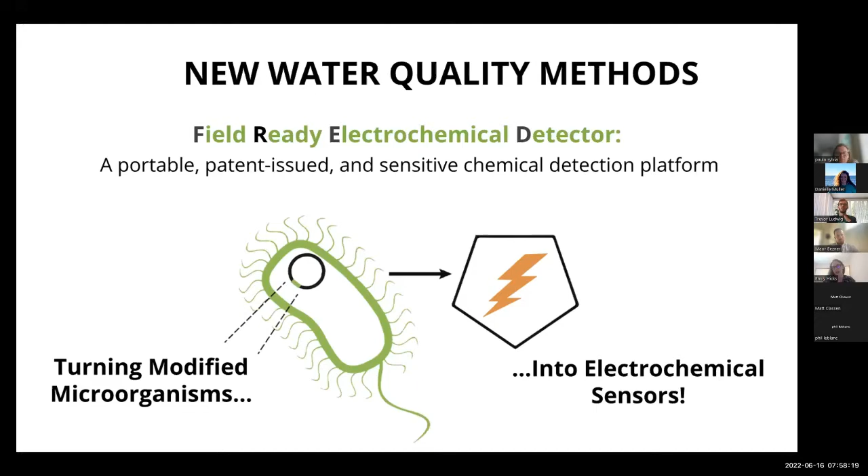What we determined was that using bacteria, we could create hardware and software systems to enable this field measurement. What's really interesting about bacteria is that they've evolved over many years to detect all sorts of different contaminants they have to interact or respond to. We spent several years creating hardware and software systems around this to allow us to use these sensors in a field environment.

The FREDsense model today is based on a cartridge. We make small cartridge units that you add a water sample into. You plug it into one of our FREDsense devices. It does an incubation period, and in about an hour, it has data ready that it can transmit to you about the concentration of a specific parameter.

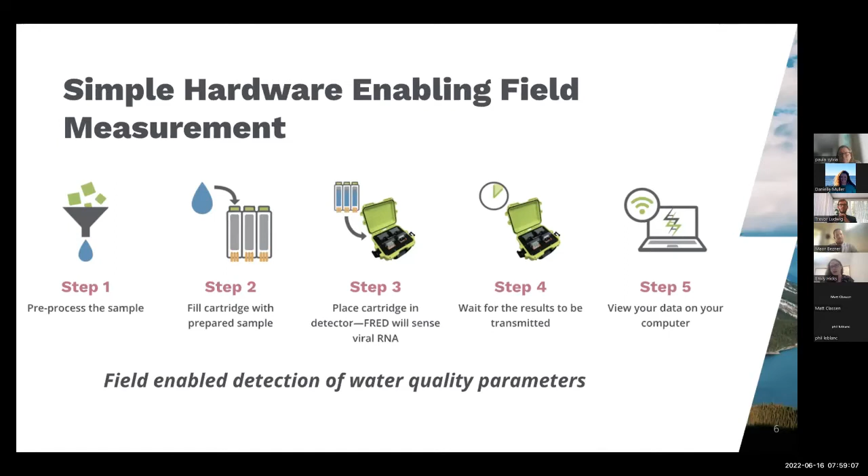The company started initially with arsenic analysis. That was the first sensor we built and is commercial now. This was really focused around groundwater and around utilities in the southern US.

We realized that there's arsenic naturally occurring in many groundwater systems across all sorts of different countries, and lots of places have active remediation, but they really don't have ways to actually measure that in real time. They're often relying on analytical lab results, so they get a snapshot of what arsenic levels looked like maybe 2-3 weeks ago. That's not terribly efficient when you're trying to streamline a process and make sure that you're always remediating within an appropriate amount of time.

So our first sensor was called FRED-Arsenic. We used a bacteria that we engineered to be able to detect arsenic, and we were able to get some really great results. This was some data that we collected with a partner utility in the southern US, where we were looking at measuring a series of different groundwater wells across their system using the FRED-Arsenic system, and then comparing it to both a process lab that they had on site, as well as a compliance lab that they were using to do their quarterly sampling.

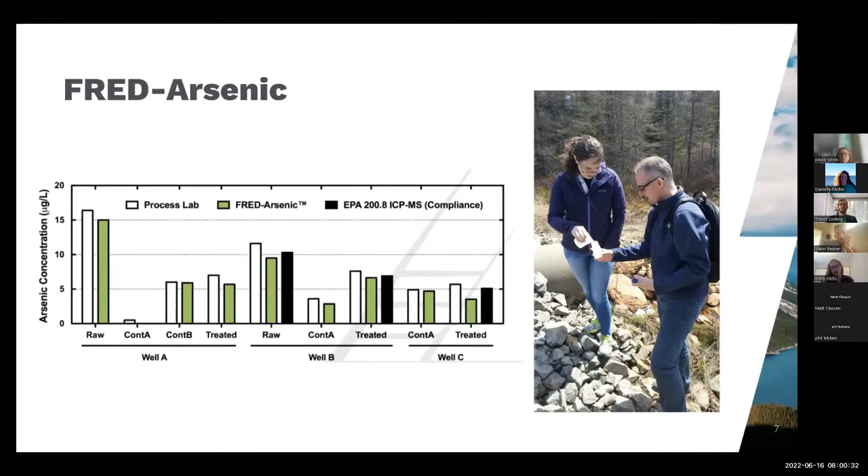We're able to see some pretty good results where we generally were able to come within 2 parts per billion or less of what the analytical lab was seeing. This was really helpful for them because this allowed them to use our system on site to be able to actually streamline their remediation process without having to always rely on the analytical lab each time.

As we developed things further, we had a really interesting project with a government group in Canada, and we were working with them on developing a sensor for an additional heavy metal. But they also had a request to develop a sensor for acidity. This was a really interesting challenge because bacteria aren't really very equipped to develop sensors for acidity. That's not really a parameter that they can detect.

So we were looking at other ways to build in a solution for this that could work with our existing platform. This led us down a path of using a lot of the skills that we developed in terms of creating field-enabled hardware and creating robust solutions and some liquid handling components. We started developing more of a colorimetric platform, and we did some work creating an acidity and an iron sensor for this government group.

We were able to get some really great results with a field kit that we created that had very little input from the user. This was one of the early prototypes in yellow, and you can see it has 2 little sample bottles on it that a user would essentially fill up with a water sample, plug into the unit, hit go, and it would run an acidity and an iron measurement on it.

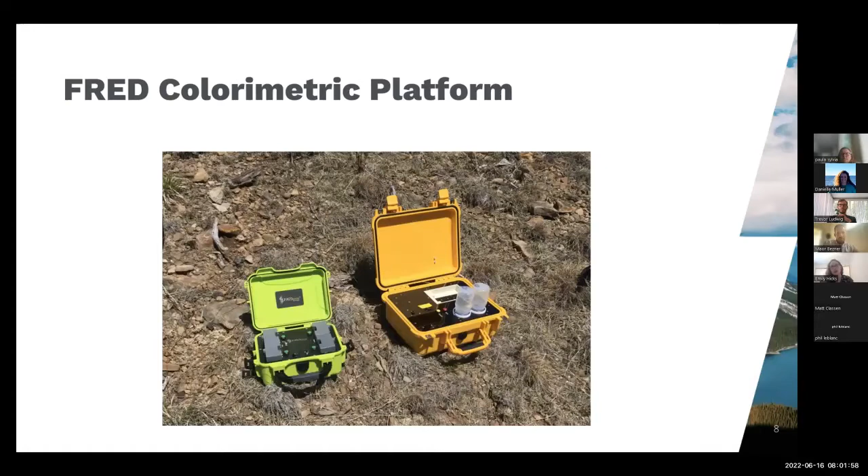This was really exciting for us and led us down a bit of a different pathway because we realized that there was a lot of different parameters that we could build on this colorimetric system and really provide this easy to use system in the field, building on a lot of our core hardware that would allow users to be able to measure some of these things in real time. So that led us to get more involved in things like stormwater and ports and looking at what kind of parameters might we be able to measure after a storm event, for example.

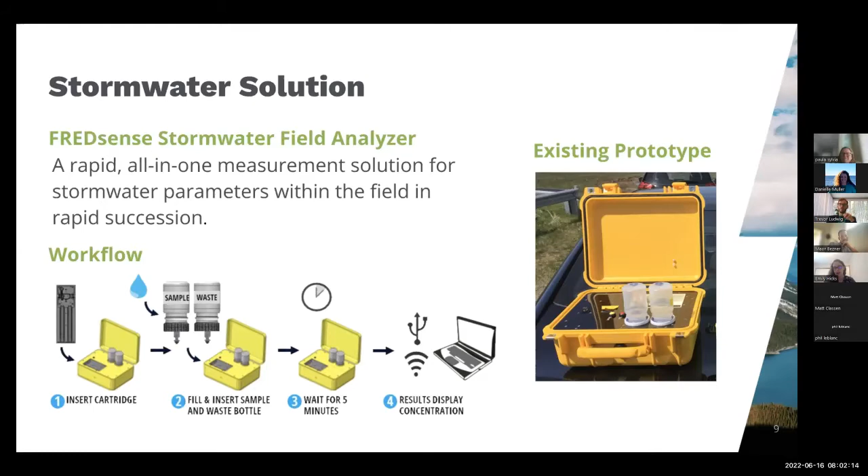This was kind of the development of a bit of a sister platform for us at FREDsense, which has been really exciting. This is really what's led us to the work that we're doing with the Port of San Diego, which we're really, really excited about.

We've started work with them on developing a 5-in-1 solution for measuring some different heavy metals. We're focused on the detection of copper, nickel, aluminum, lead, and zinc, and essentially creating a portable unit that allows a user to be able to measure these by just taking a water sample, plugging it into the unit, and we then have a cartridge-based system that's able to have the reagents stored in it for this test and able to run these different parameters and be able to report data on this.

This has been really exciting for us because it's a little bit different than what we normally do, but fits into a lot of the hardware solutions that we're using. It has allowed us to get a lot better at things like liquid handling and automation, which in turn is allowing us to push forward some of the work on our biosensor platform, where those were really holdups in some of the development that we were looking at, especially as we look to the future to more automated, potentially even inline systems for some of the groundwater work that we're doing.

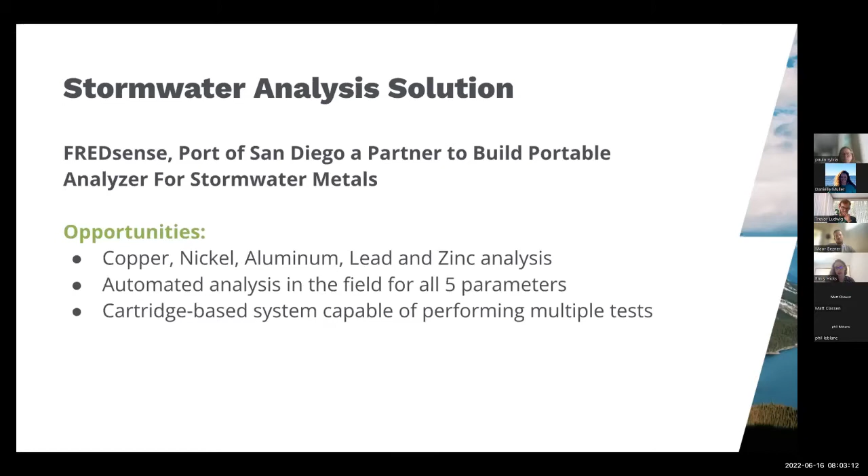Some of the project objectives that we have are really just to demonstrate accuracy of these tests. We're doing some work in the lab setting, which is what we initially started with, then starting to build some of these field tests, and we're planning to do some field pilot work with the port. Eventually the goal is really to have commercial delivery of the system.

So we're hoping that through doing some comparison analysis of our test with the analytical lab, using real world samples in a real world setting provided by the port, we'll be able to show the use case that the system is easy to use and that we're able to get high quality data. Hopefully this will lead to eventual commercial delivery of the system, and our ultimate goal would be to get some kind of regulatory approval on this down the road.

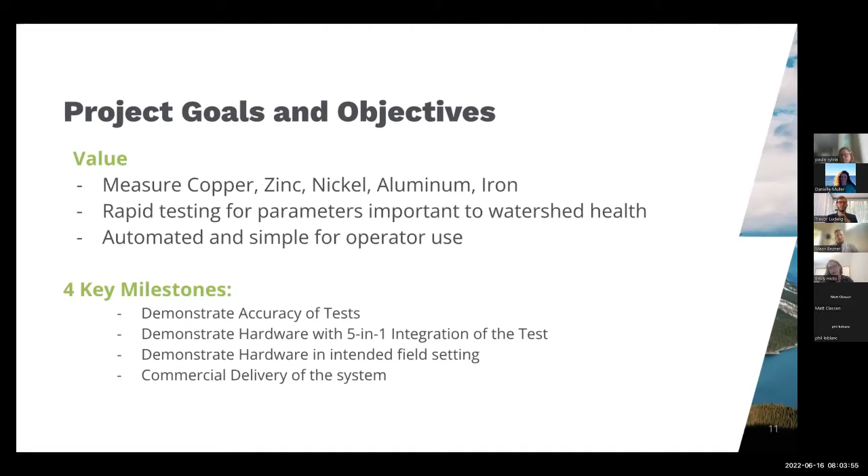So really the goal behind FREDsense is to create a real platform. Outside of some of the stuff we've been doing with the port, outside of our arsenic work, we have a suite of other sensors that we've been working on that are either at pilot phase, commercial, or earlier stage. We've been doing some interesting work on COVID-19 analysis in wastewater, and we have some interesting projects with partners looking at emerging contaminants such as PFAS, selenium, and other heavy metals.

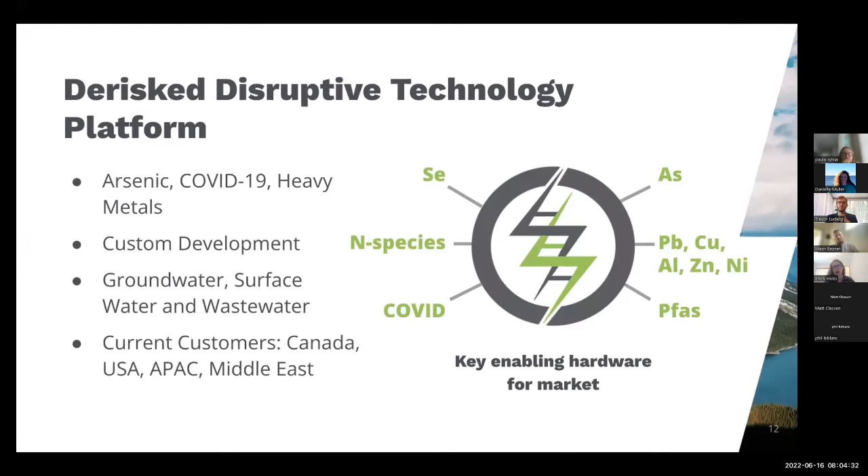And we have customers today across Canada and the US, but also doing some interesting work in the Middle East as well as APAC. So I'll leave things there. I hope that gave you a little bit of information about FredSense, and I'm happy to answer any questions you have or connect with you in the future. Thank you so very much.

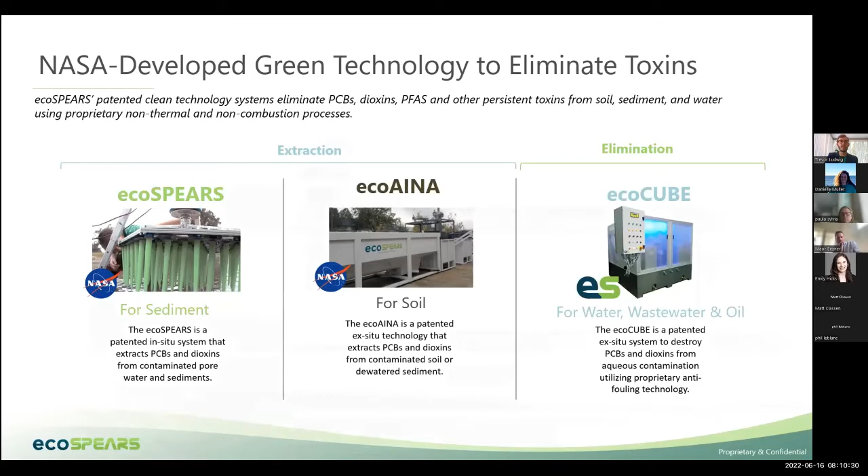So to give you guys an idea of what spears really do and how they work - since everything that comes out of NASA has to have an acronym, so do the spears. SPEARS stands for Sorbent Polymer Extraction and Remediation System. It's a fancy term for saying that they're 12 or 18-inch spikes that we put an alcohol reagent on the inside of. The picture on the left here is actually the one that we did with the Port of San Diego, and that was a really key piece for us as a company and for the technology, as it was our first in-field live application of the technology for impacted sediments.

What was interesting with the Port of San Diego is they had an endangered eelgrass species, which I'm sure a lot of the ports around have - species that have really sensitivities for some of the methods that they have for cleanup. In utilizing our spears, we're able to go around where we've seen the eelgrass in the past and continue to do a passive remediation surrounding that sensitive environment. So we're not actually destroying and having to repopulate or replant that species elsewhere throughout the port.

One other important thing that we had with the Port of San Diego is an economic incentive for the port. With most current methods, if you're talking about doing remediation in the port, you're either talking about dredging or capping, which can shut down the port for an extended period of time to do that same remediation for the impacted sediments.

What our spears has allowed us to do is work hand in hand with the Port of San Diego in busy port slips like what you see here, to deploy our spears down into the bottom sediments and then move the boat off site, and you'll get a passive remediation. What we're doing with the Port of San Diego is going to be an evaluation of 24 months for the absorption rates of the spears themselves for low-level PCBs within the port.

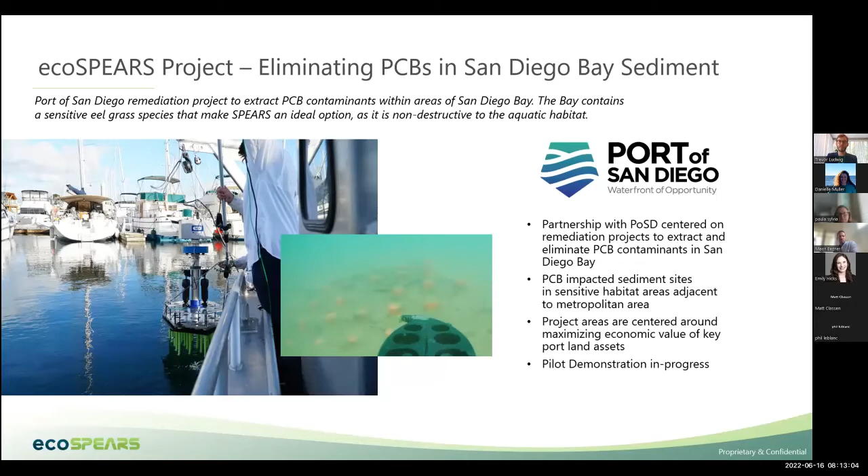We also signed a pilot with Umeå University in Sweden. This really challenged us - we knew we could deploy our spears in a strategic area from what we've learned with the Port of San Diego. Now it's a matter of, can we do it in an area that's not common and familiar to us? So we picked a fiber bank that was also an old paper mill.

Instead of having your endangered eelgrass, here we're actually deploying around logs, and we're going after impacted dioxins rather than just the PCBs and PAHs that we have with the Port of San Diego. So we had a lot of lessons learned from the Port of San Diego that really helped us out with Umeå University, thinking about how we're branching out from PCBs to dioxins and PAHs.

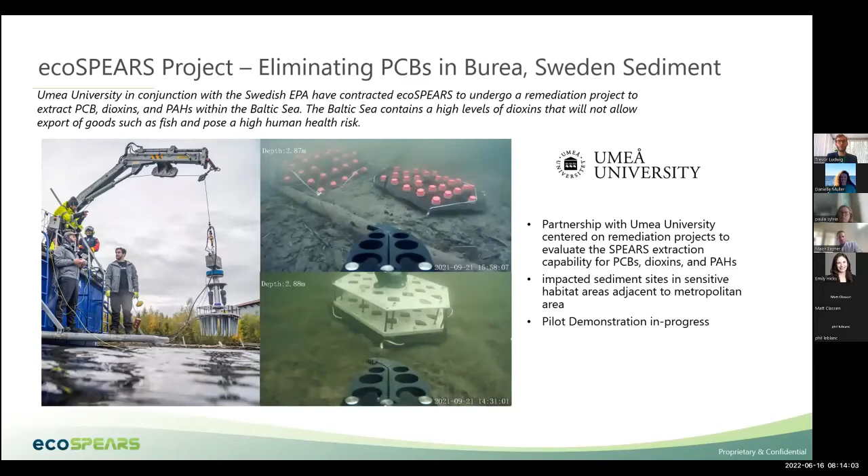What happens if we're now looking at more upstream areas, like in a tidally influenced wetland area? This is what we're actually working on now for a client on the Anacostia River. This is a PCB area that is more of an upland setting. The tide comes in and it's roughly underwater for about 7 hours. The tide leaves and it is a walkable wetland area.

So in looking at how we can help more of the ports in these coastline communities, we're now able to walk out to these wetlands and do just a down pressing of the spears themselves without the use of boats altogether. What we're really targeting is trying to hit the PCBs before they make their way into these deeper sediments that could potentially be washed out to the ocean altogether.

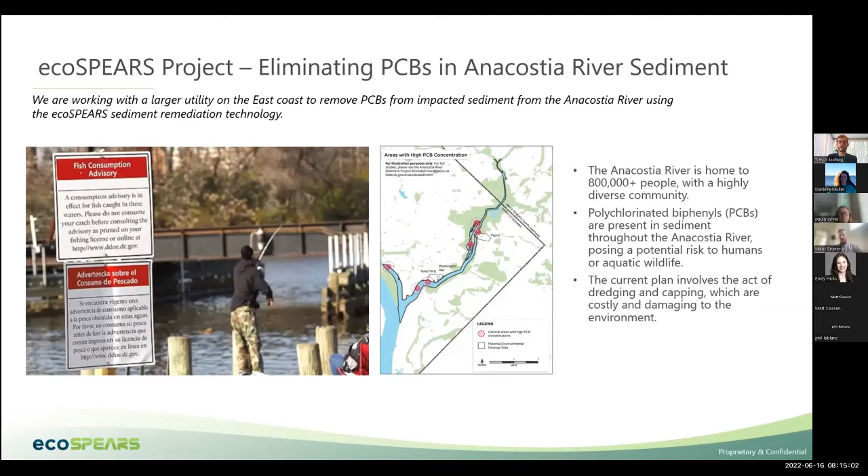Think about this area as more of us creating a curtain of spears, where as the pore water is moving in and out of that bulk sediment area, we're going to try to absorb those chemicals before they make their way into the river and then out to the sea down below.

You have about a minute left, Trevor. Awesome, Matt, thank you. Perfect timing, because this is actually the end of the presentation here.

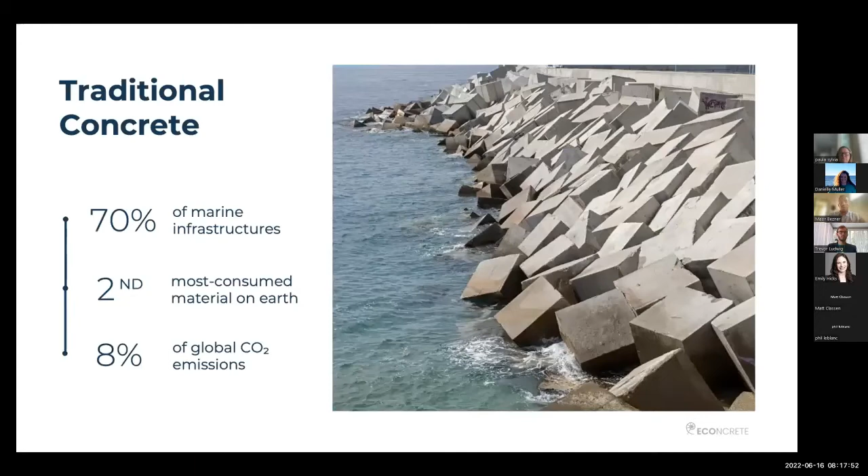And concrete is not, let's call it, a very good ecosystem for the natural habitats of these waters. It's not such a good habitat because of the byproducts of mass production and because of its material composition, which tragically enough make it the best material for marine construction.

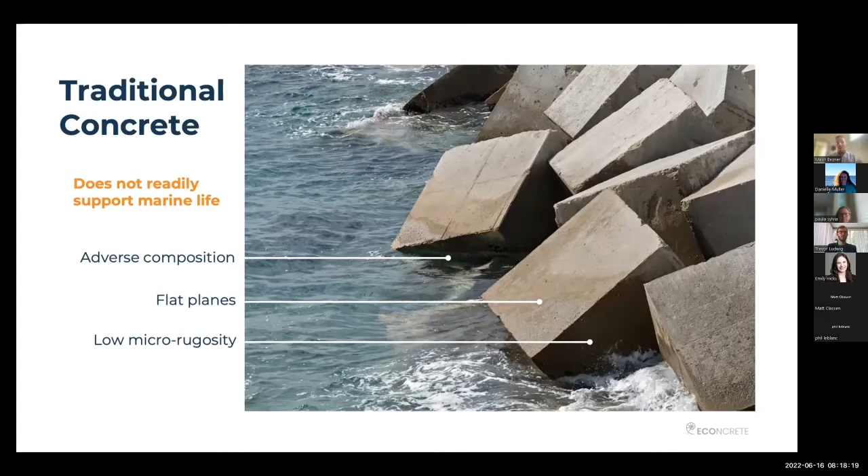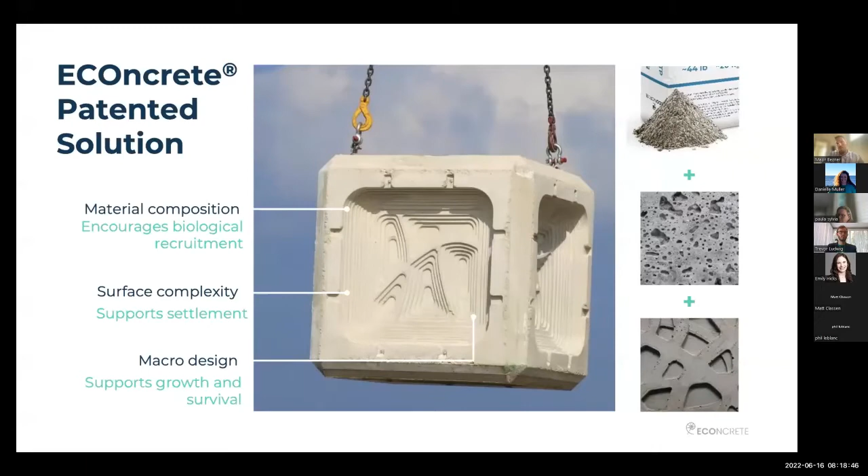However, being the scientists that they are, they have developed a 3-pillar design system, which is comprised of the admix that deals with the material composition, and 2 other layers of micro and macro design to facilitate the growth of biological species in the marine environment. Now, what you're seeing here is a block that is designed with these 3 pillars, and a very similar block was placed in Haifa almost 8 years ago.

Now, what you can see here is a piece of construction-grade concrete that complies with all the marine construction standards all over the world, but it's also a thriving habitat to sessile communities and algae and vertebrates and sessile invertebrates, which are very fancy words for seashells and sea fish and algae. What these creatures do in return, they filter the water, they clean it. That's how they survive.

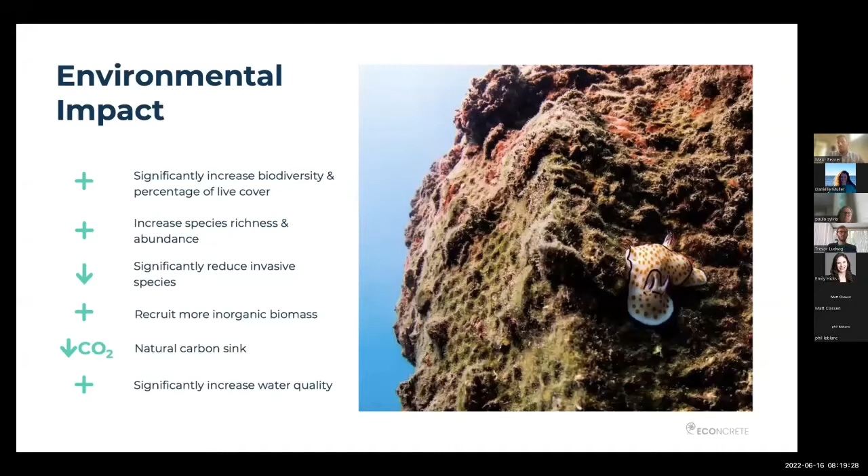Not only that, they actively sink the carbon from the water and attach it to the concrete, thus creating a stronger, more lasting infrastructure. Now, the admixture will enhance the concrete strength by about 10%, thus reducing its sensitivity to erosion and corrosion, and preventing chloride penetration, which is a very big pain if you're building a port. We're not going to touch that today.

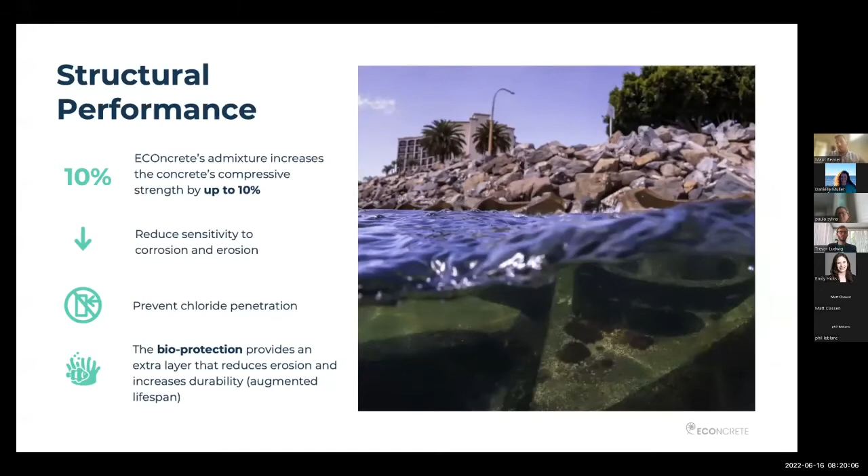And the most positive side effect of these 3 pillars of design and this admix is that you have a live layer of calcium carbonate, which again is a very fancy word for seashells, that protects your infrastructure, making it longer lasting, more resilient, and more cost effective.

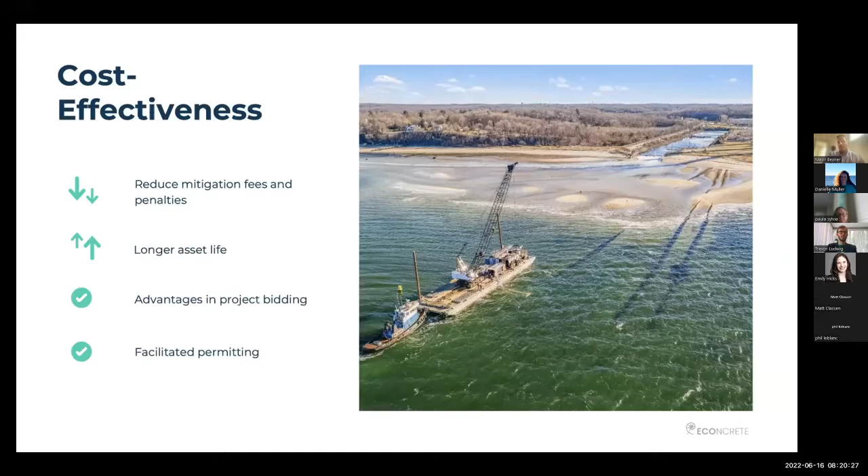Now, it's more cost effective not only because it's longer lasting, more healthy, and more effective. And we're talking about a 120-year mix design. Yes, that's very long. But again, we're not in the marine construction presentation today. It can and will also help in permitting. But how the hell did they come up with this idea?

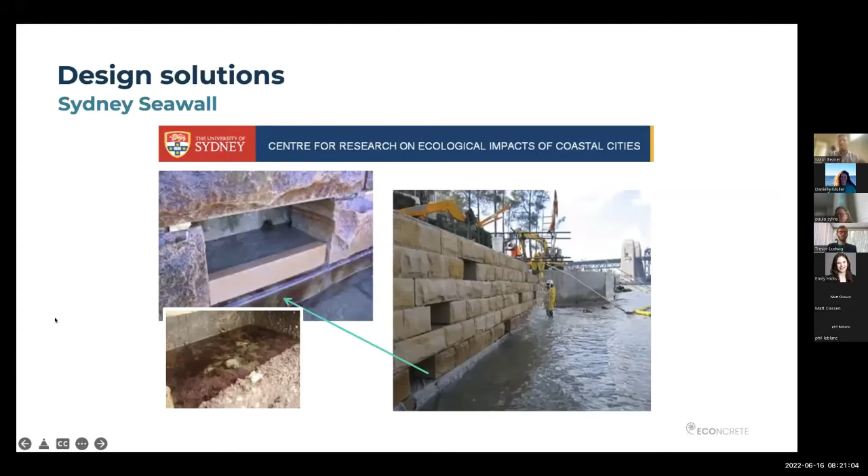Having said that, at the same time, there was a trend of biodesign that was appearing at that time. I think it's around 2012, the Sydney seawall, and the Seattle waterfront in 2015, which is an amazing landscape project, and I recommend everyone to check it out. And they were having very pleasing results with some of the things.

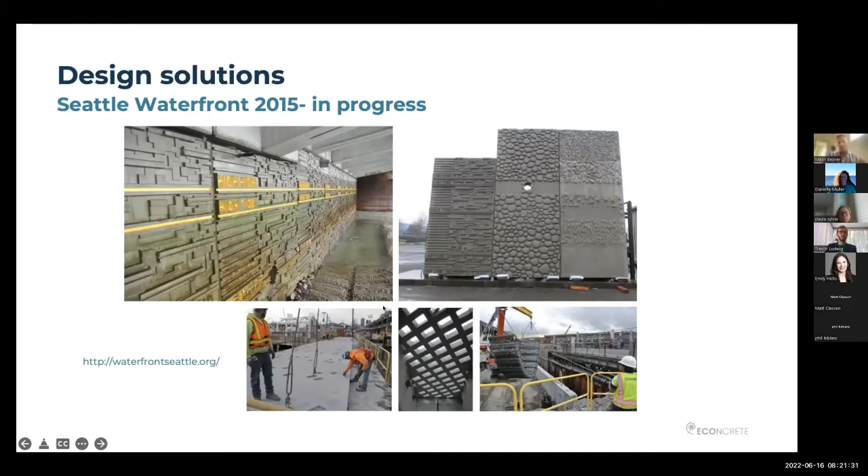However, the concrete itself, as you can see here on the left, was still, let's call it, dry or not bio-recruiting. The whole design of the project was a great success, by the way, but the concrete itself had very limited results, as did a couple of other projects worldwide at the same time. So they understood it has to be not only the macro design, it has to be also the micro and the material. Thus, they came up with this 3-pillar solution.

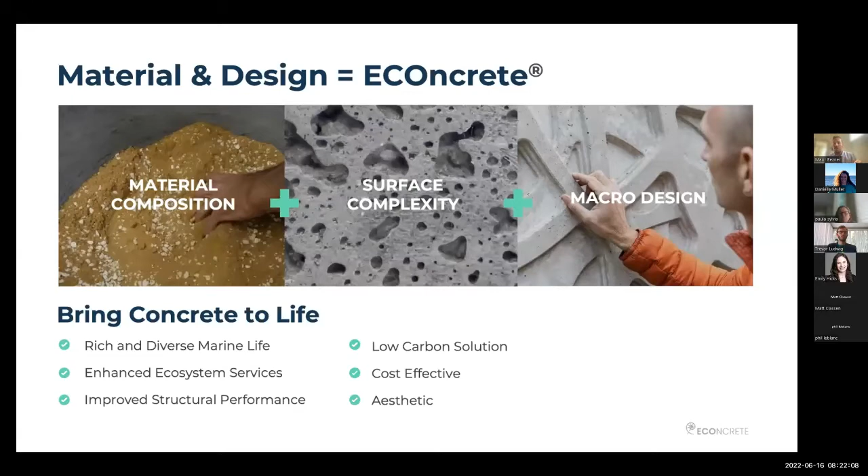A, the material, as I said, to even out its harmful impact on the environment. And the more crucial part of the design is the 2 layers of micro and macro design to facilitate the attachment of young larvae, of young baby species, and then to make a bigger home once they grow so they can stay attached to this infrastructure.

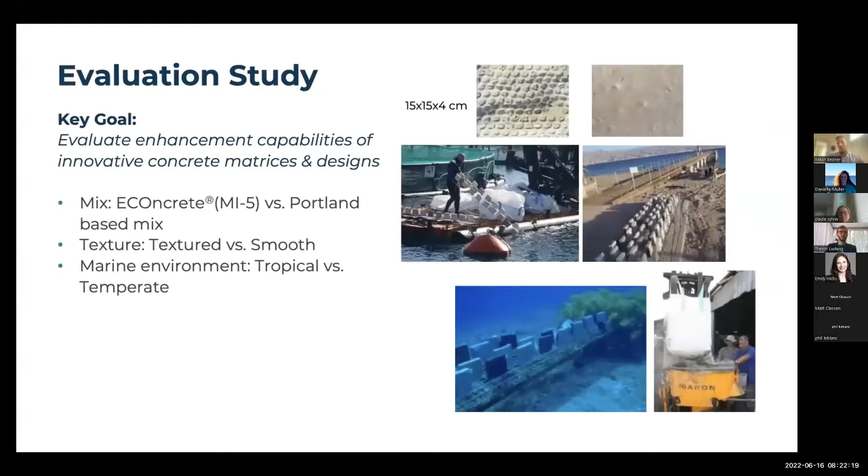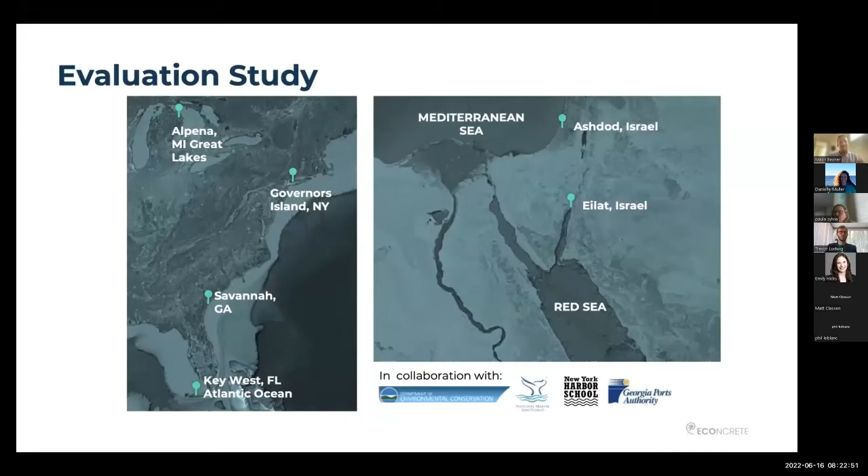So being the scientists that they were, they straight away went into validating it with very long experiments at sea. I'm not going to step all the way into it, but in order to verify that indeed you have something that works not only in one single place, there was a need to create a huge variety of data from different environments, as you can see: Red Sea, Mediterranean Sea, Atlantic. We'll see at the end the Pacific Ocean in San Diego, and even the Great Lakes. And the more they did the tests, the bigger the database became, and the results were pretty coherent.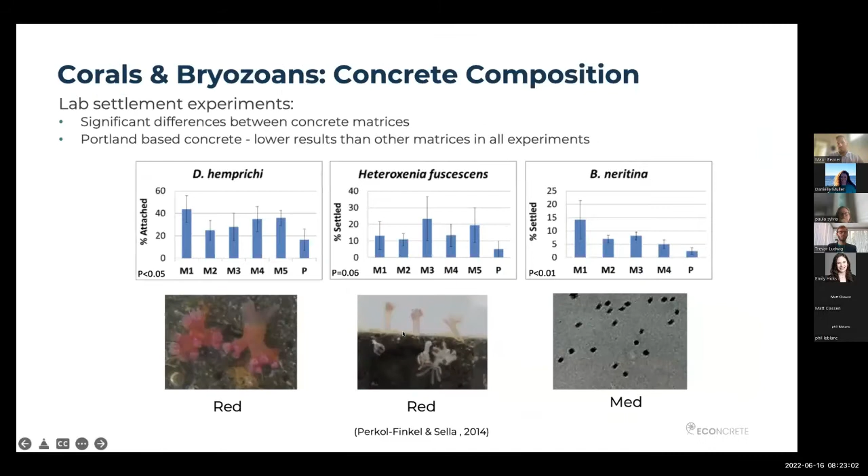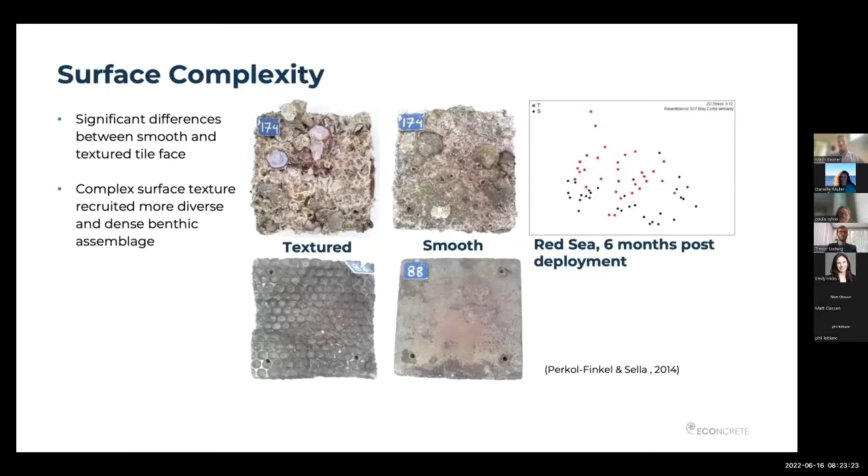If you combine, sorry for repeating this for the who knows what time, material and 2 layers of complexity, what you get, as you can see here on the left top corner, is a living piece of concrete that is better not only for the environment, but for the construction it's going to build. So we were amazed with the results. We didn't believe we would get such things. And these kept on coming both from lab tests and from the Red Sea.

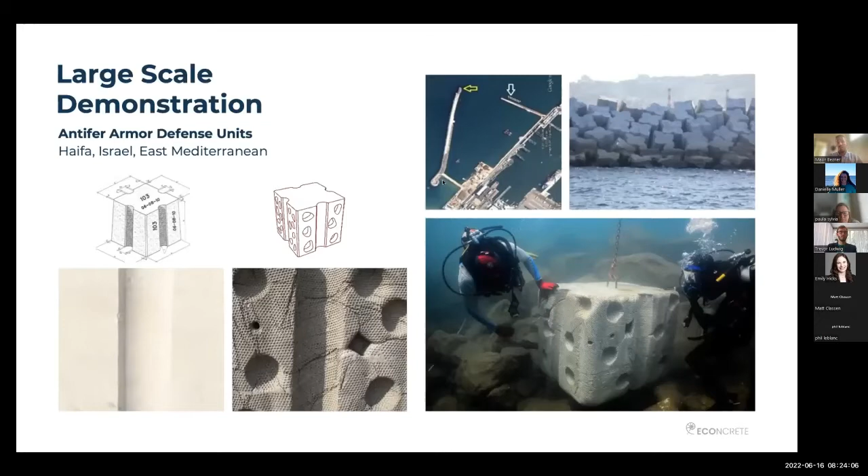And at that point, I think it's 2012, there was a need to test it on a full scale. Luckily, they managed to get a pilot in with a full-blown breakwater that was built outside of Haifa. And I don't know if any of you or the participants know Haifa, but I assure you, not the highest quality water. But they managed to put same size blocks as the breakwater, just with these 3 pillars of design, and to monitor them over the course of 3 years. And lo and behold, the results were outstanding.

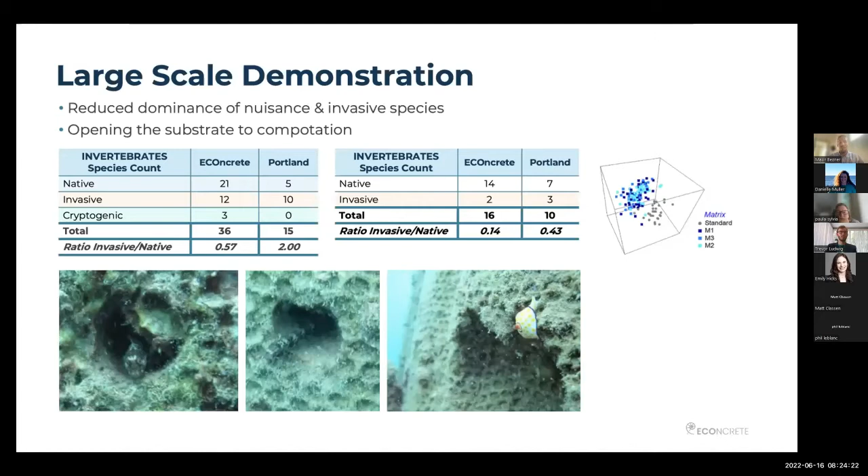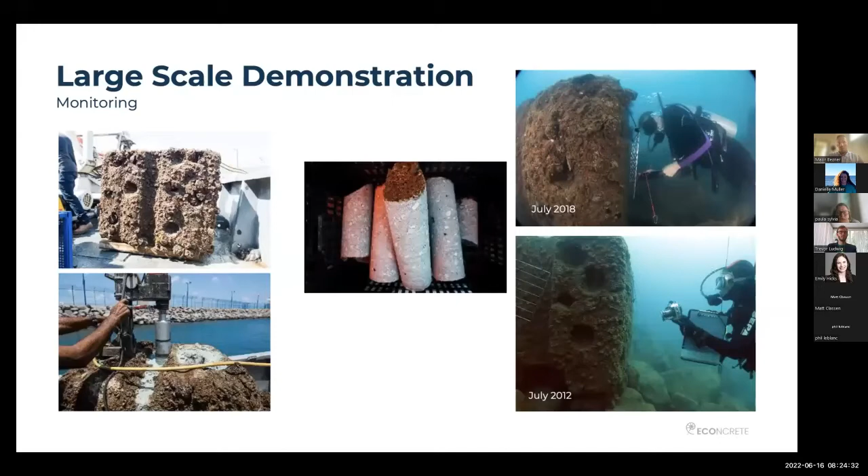You can see here in all the tests, the invasive to non-invasive species, the sessile communities, the clams, the water quality, and the concrete quality all improved tenfold. At this point, okay, so we had a local pilot in Israel. Now it's time to expand. And where better than Brooklyn and New York?

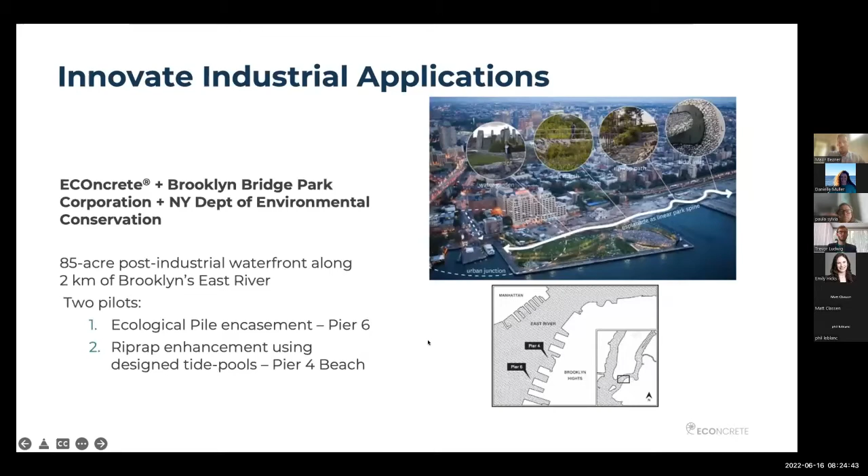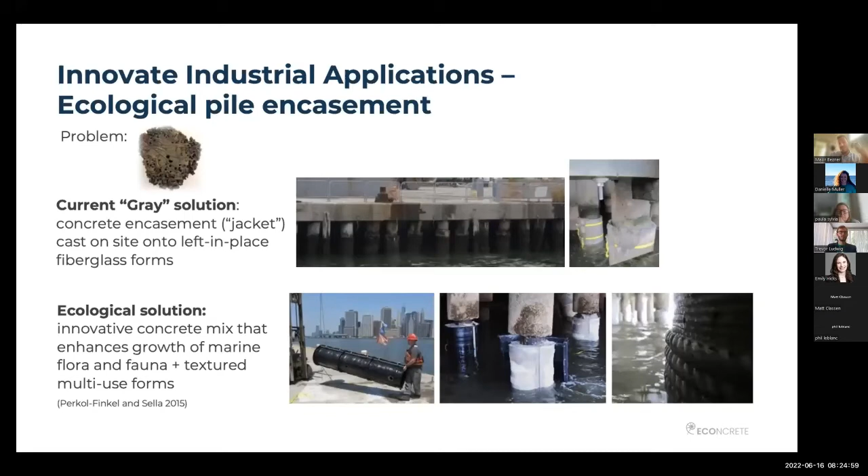There was a need in the city of Brooklyn to, oh, my presentation seems to be stuck. Oh, there we go. But there was a need to reinforce these pile jackets. Now, traditionally, this is done with one-time molds that get stuck there. Sometimes they're from plastic, sometimes they're from fiberglass. However, by implementing these 3 pillars of design, again, you can see the results here on my right. There is no way to argue about it. There's a control jacket and there is an ecological enhanced one.

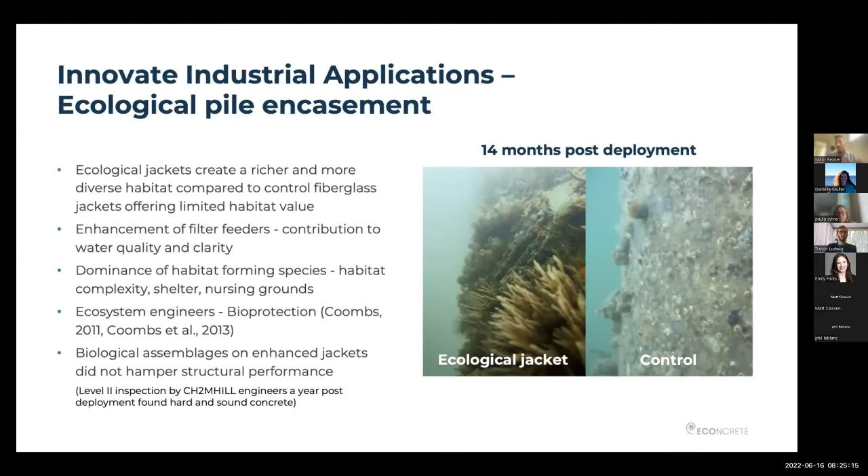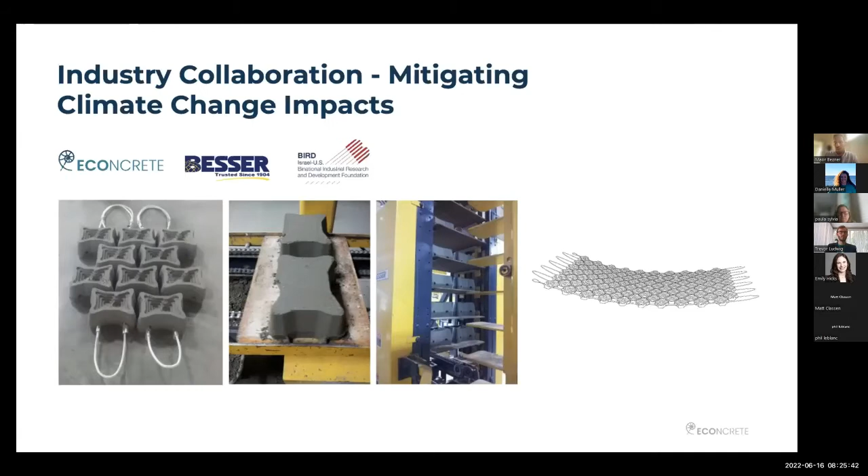But at this point, we were lucky enough to get a grant from the BIRD Foundation, which is an Israeli-American foundation for binational industrial research and development, and to team up with an amazing partner called Besser. They're the lead producer of mass production concrete factories in the US. And we were able to develop a product that is, again, in high demand in the concrete infrastructure market, which is an articulated concrete mattress. And what you can see here is the results. And now I'm sorry for going a bit fast because I want to have time also to touch the project that we did in San Diego.

The next step that we had was getting into the specification of this amazing project, the Living Breakwaters project. And this is a huge project. These are 7 breakwaters that are built outside of Staten Island. And they are all implying not only these 3 pillars of design, they're also implying other very progressive bioenhancing designs on the full scale designed by SCAPE, which again is an amazing partner if you're doing projects of this magnitude.

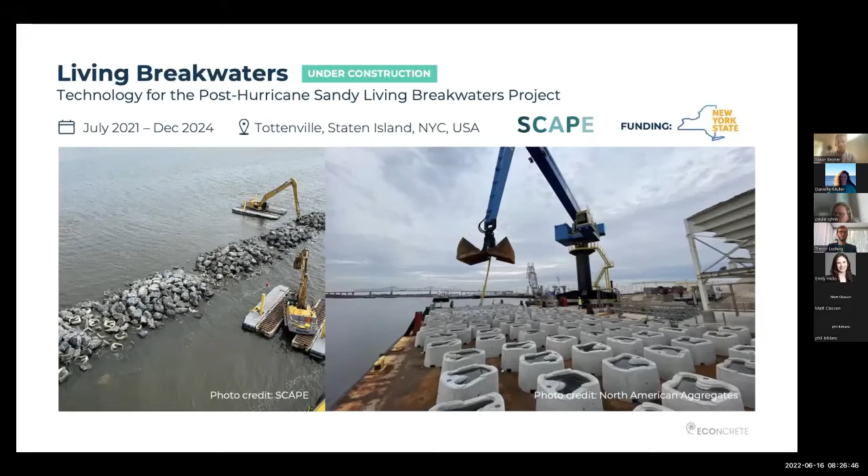Now let's talk about San Diego and the Blue Incubator. Luckily, we had a chance to cooperate here, and then again, big shout out to all the team that we were lucky enough to work with. The Port of San Diego wanted to look into a replacement for the riprap revetment. And we wanted to introduce into the market a single layer interlocking concrete armor system that is also a thriving habitat for marine species. And luckily enough, we had the chance to do it together.

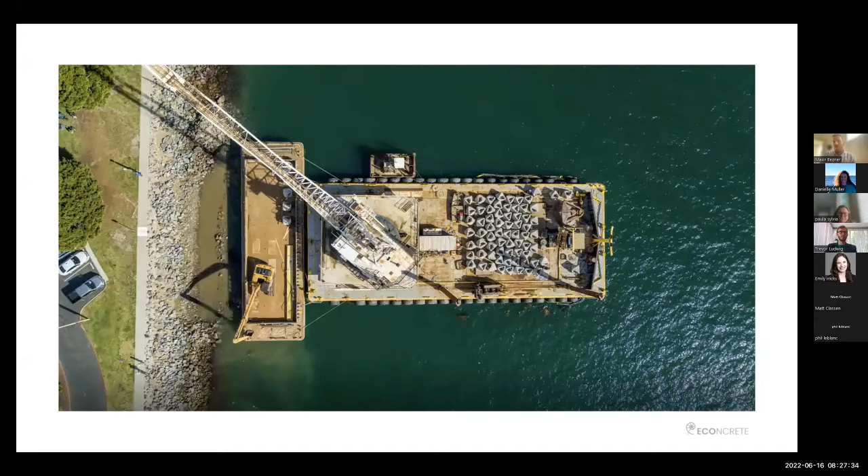Mind you, throughout COVID, it wasn't very easy, not only on the technical side, but we couldn't make it to San Diego. So that was even more challenging, but we managed to go through it. And here you see the installation in March 21. Now, what's interesting about these units is the fact that, as I said, they're single layer interlocking concrete units that are biologically enhanced. But because they are single layer and interlocking, you can use less concrete, less material to get greater shoreline stability. Therefore, you are saving in the amount of material and emissions you're putting along the shoreline.

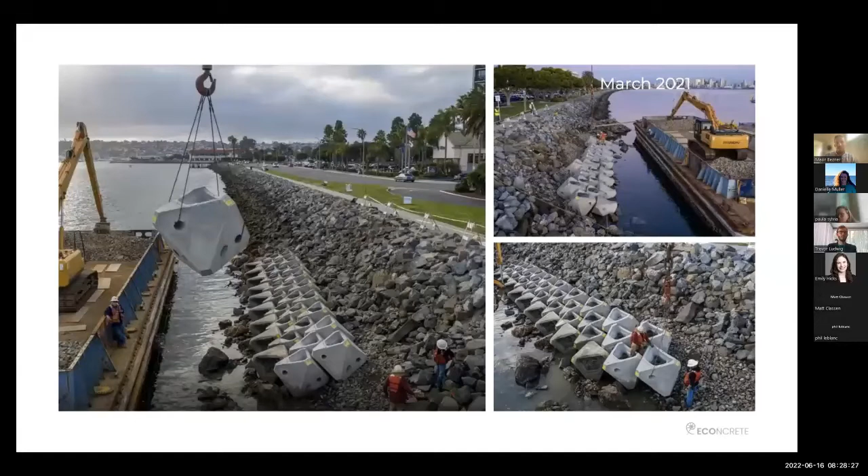And because it's also bioenhanced, these units, as you can see, they have a very unique shape. So if you shape them in one way, as you see here in the bottom, they are caves. Although if they are slightly oriented in a different direction, they act as water retaining elements. So this is the finalization of the installation in March 21. On the monitoring we had in August 21, 5 months later, we were amazed with the results. What you can see here is an immense amount of, again, I can say the Latin names, but I think it's not the point. I think the point is their variety.

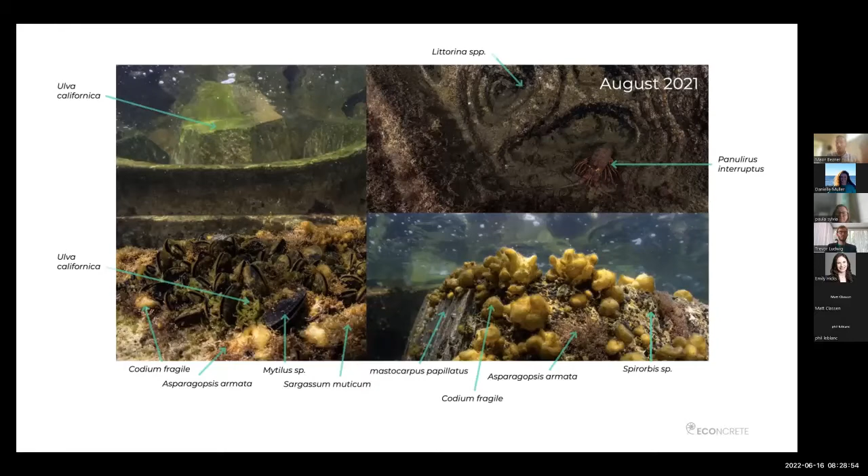What you see here is concrete that is thriving habitat and is protected by that habitat and enhancing that habitat at the same time. At a later monitoring, three months after that, we were able to see even bigger marine species, like this humongous marine hare, or Aplysia californica in the Latin name, in its natural habitat, and it hasn't been seen in that area for a long time. The reason is simply that riprap does not have water-retaining elements, and this species needs a pool that fills up during high tide and stays there during low tide to lay her eggs. And this mother was there taking care of her offspring,

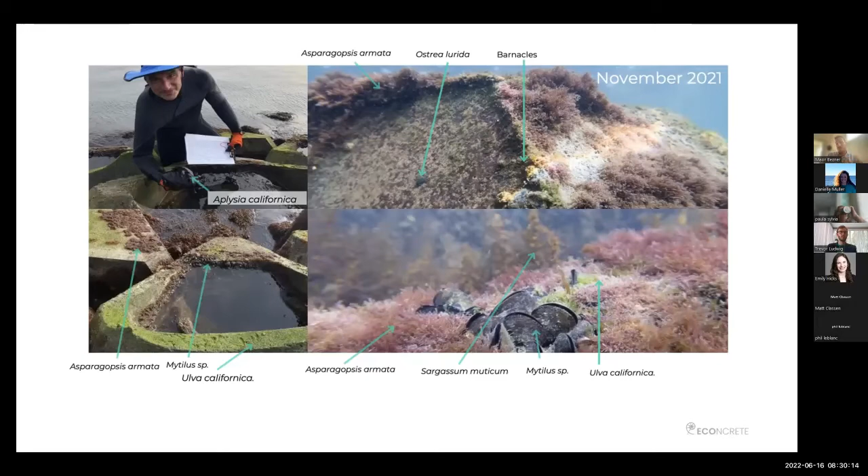and we were very, very happy to see it. Now, this pink algae you see here is also a very, very interesting creature, and the reason it's so interesting is what it does to survive. It actively sinks carbon from the water, takes it apart, releases the oxygen, and sinks the carbon into the concrete, protecting the concrete and giving the Port of San Diego resilient concrete infrastructure with a positive carbon sink, which I think is a truly unique matter, no matter how you look at it.